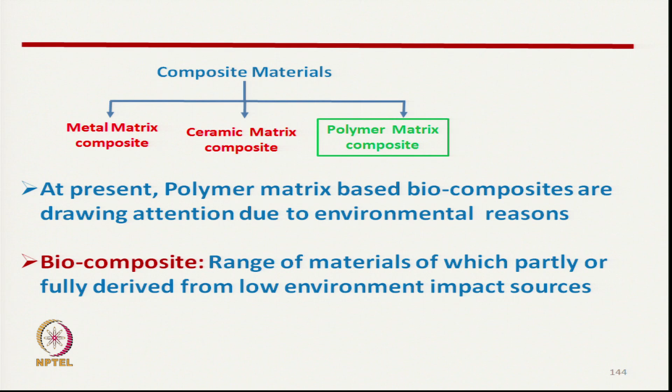So what is biocomposite then? It is a range of materials which are partly or fully derived from low environment impact sources. So at present what we will discuss is a manufacturing method of composite, where at least 50% of the composites are made of natural fiber.

So at present we will discuss the flax fiber, which is biodegradable, and for the matrix component, here we will discuss the thermoplastic fiber, that is polypropylene, where if we want we can reuse the matrix once again.

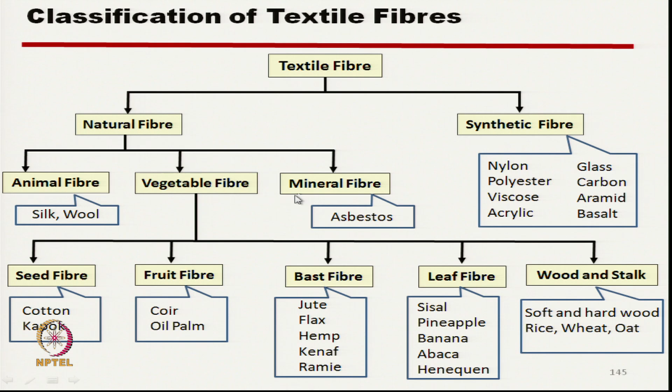So as already mentioned, textile fiber can be divided into two broad classifications: natural fiber and synthetic fiber. At present we will be discussing natural fiber, and that is vegetable fiber. Natural fiber is subdivided into three categories: animal fiber, vegetable fiber, and mineral fiber.

So present day biocomposites are manufactured mainly from natural vegetable fiber, and here we will discuss the flax fiber, which is used as reinforcing material in manufacturing biocomposites.

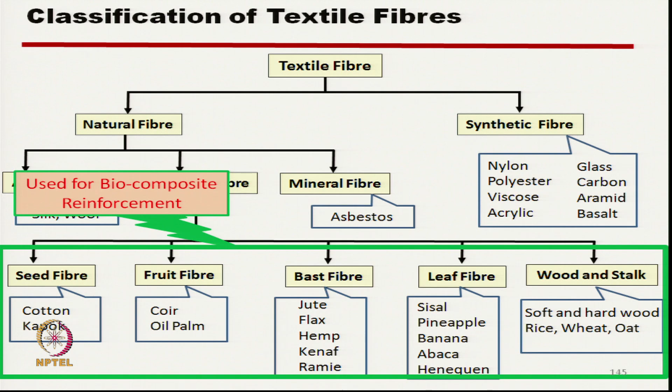So as far as matrix is concerned, polymer matrix particularly, they are of mainly two types: one is petroleum based polymer, another is biodegradable polymer. Petroleum based, as already discussed, is of two types, one is thermoset, another is thermoplastic.

So for thermoset, the limitations are they are non recyclable. Once the composite is manufactured, they cannot be reshaped or reused again. Limited storage time, longer curing cycle, and corrosive to handling - these are the disadvantages.

Due to that, present day composites are focused towards thermoplastic polymer. And if we try to use 100% biodegradable polymers, the main drawbacks are their limited availability - they are not available in large quantity - and another drawback is their cost. So high material cost to service life ratio, their service life is also low, and at the same time high cost.

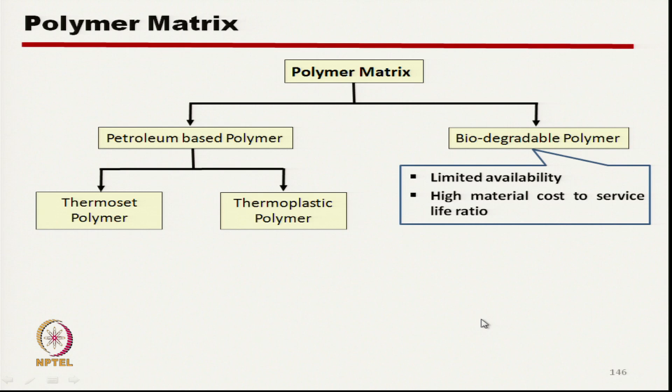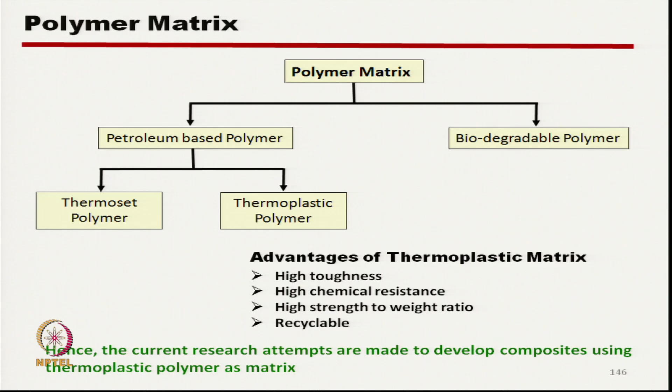So the alternate way, the only way at present, is we can use thermoplastic polymer as the matrix material. Their advantages are high toughness, high chemical resistance, high strength to weight ratio. So if we take a certain mass, the strength we get is relatively high, and most important is that they are recyclable. Hence in the present development we have used thermoplastic polymer as matrix to manufacture composite.

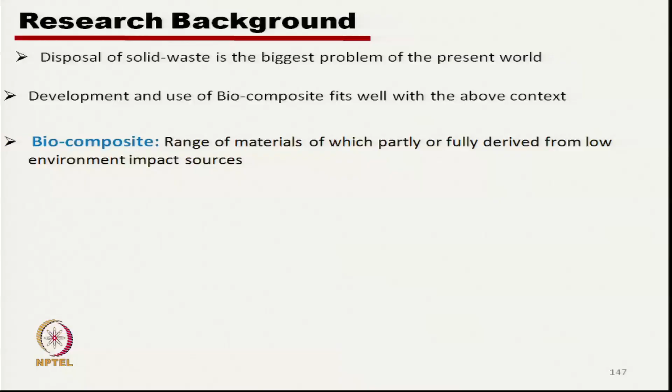So the basic driving force towards this direction is disposal of solid waste. Disposal of solid waste is the biggest problem. Once we manufacture composite from thermoset polymer, after use the disposal is the main concern, because we cannot reuse that.

So other driving forces are development and use of biocomposite, which fits well with protection of the environment, and biocomposite we can reuse again and again. But before we go for manufacturing biocomposite using natural vegetable fiber, there are different drawbacks also.

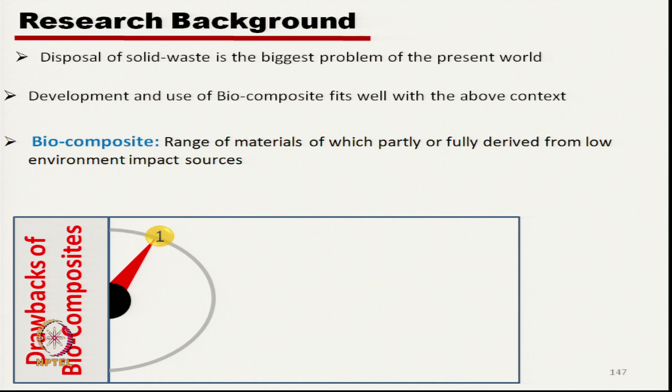What are these drawbacks? The main three drawbacks are: poor interface bonding between natural fiber, which is basically hydrophilic, and thermoplastic materials, which are in general hydrophobic. So their interface bonding is relatively weaker - that is the main concern.

Next problem is short fiber. Natural vegetable fiber, if we talk about it, we always get in short form, not continuous form. So their orientation is not along the axis. So the control of orientation of these natural fibers is very important, because we can only get continuous strand from natural fiber by twisting.

Once we twist, the fibers are aligned at a certain angle, so that we do not get the proper strength realization. And the third point is that...

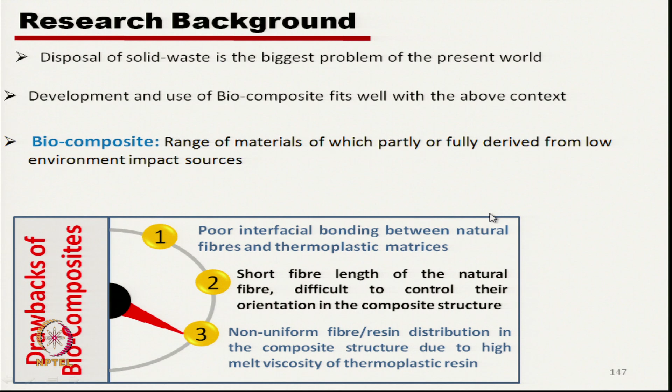So the approach is that we have produced hybrid yarn. Hybrid yarn means, as we have already discussed, where the matrix fiber and reinforcing fibers are mixed evenly together, so that the flow length of the polymer is very short. They are already inside the structure.

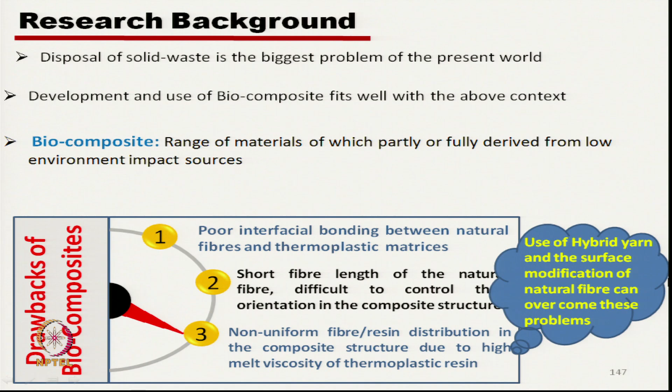And the first problem, poor interface between the natural fiber and thermoplastic matrices, is overcome using surface modification. So these problems we can overcome.

As I have mentioned, we cannot form a continuous strand from staple natural fiber without any twist. Ideally, if we get the fiber strand like a strand of parallel fibers, in that case the penetration of polymer will be easy. Now let us see the present approach.

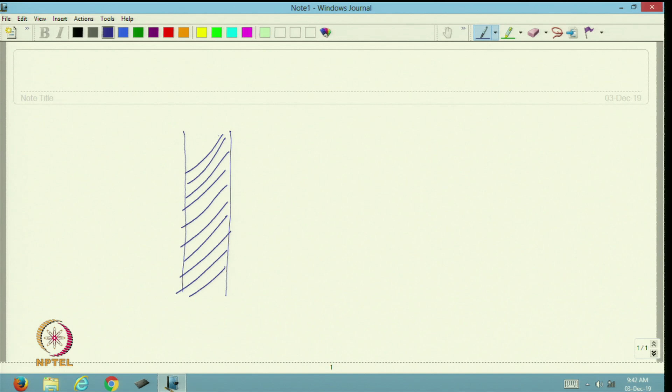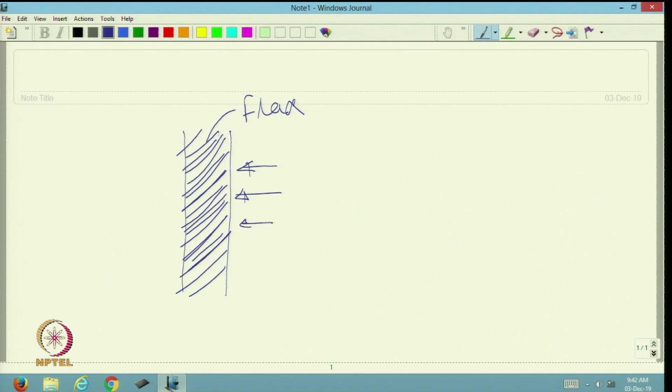Suppose this is normal staple yarn. As I have mentioned, we cannot manufacture staple yarn without twist. Now suppose this is flax, and suppose we want to manufacture a composite using polypropylene. So if we try to push the polypropylene matrix inside the structure, it will be very difficult.

Because the melt viscosity of polypropylene is very high, it is not easy for the matrix to penetrate inside the structure.

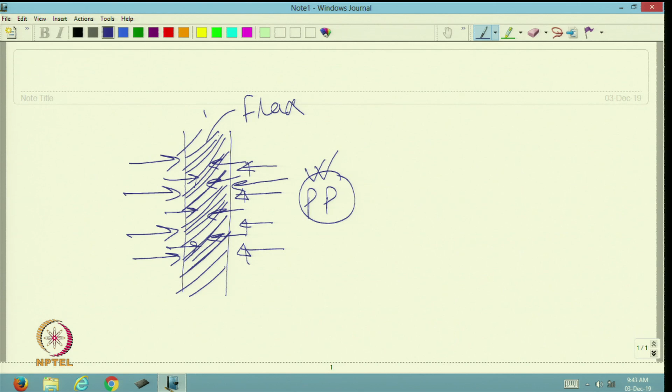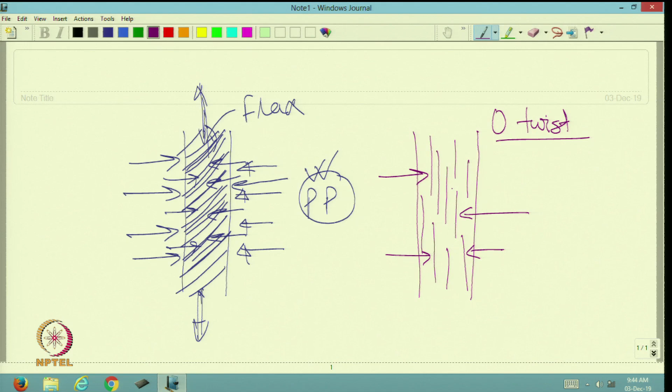So another problem is that once we twist, the fibers are at a certain angle with the load direction, so we do not get proper strength utilization. On the other hand, if we can align the fibers parallel to the axis, that means zero twist, in that case the penetration of matrix will be easier, because the fiber to fiber distance is high.

So there are spaces where the matrix can enter easily, but the problem is that it is not possible, because we have to have certain strength for handling the material.

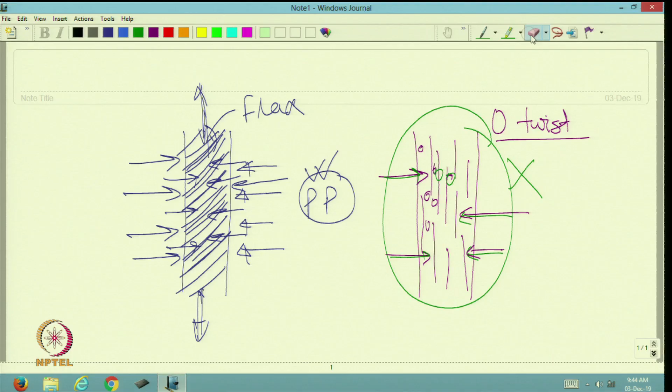So what is the alternative? In the present approach, what has been done is that rovings are made of flax and polypropylene fibers. Here these are the flax fibers, and here these are polypropylene fibers, and here again we have zero twist.

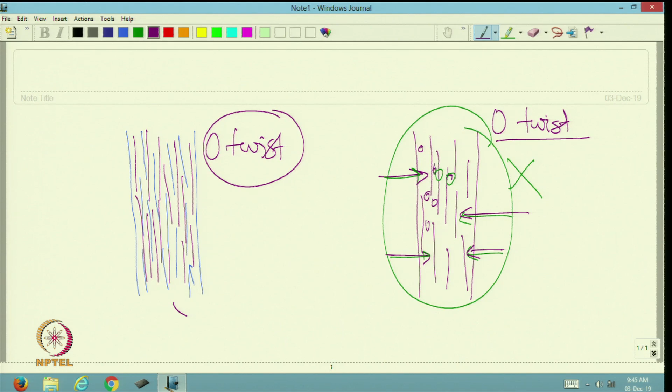But after making the polypropylene and flax roving, we treat it with heat. This heat treatment melts the polypropylene, at least the surface polypropylene fibers are melted. So they form a continuous strand, these melted polypropylene fibers.

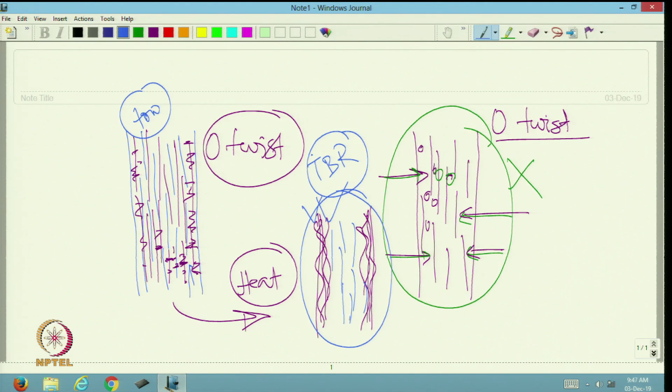And the flax fibers remain. So this prepreg, or tow preg, since we can call it a tow, this is a tow preg, which we call TBR, that is thermally bonded roving. This thermally bonded roving has got proper flexibility and we can use it in the weaving machine, and it has got certain strength also.

As has been explained, in this twisted based yarn, due to the misalignment, the strength realization is low. Although the twist improves the handling of the material, it reduces ultimate fiber strength utilization by a factor of cos theta. It also restricts the resin penetration into the bundle.

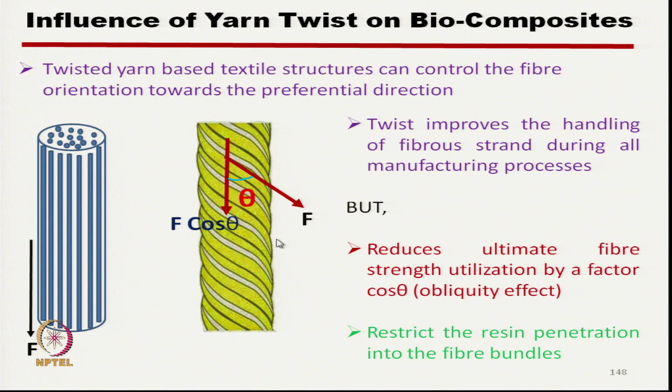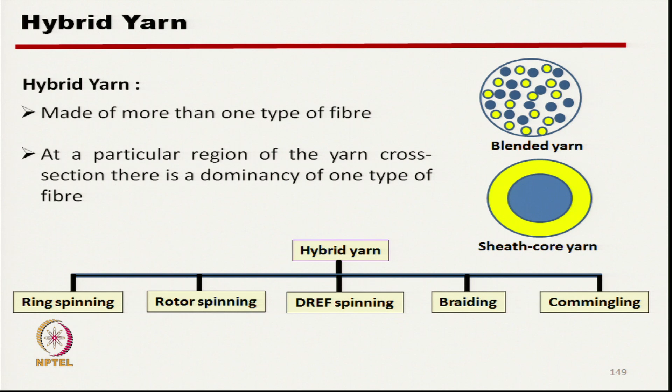As has already been mentioned, hybrid yarns can be manufactured using ring spinning, that is core sheath structure, rotor spinning, DREF spinning, braiding, and commingling. These are the different methods of manufacturing hybrid yarn. Basically, hybrid yarns are yarns where more than one component is present.

A hybrid yarn contains both matrix and reinforcing components within the structure, and it reduces the effective resin flow distance during composite formation, which is very important because thermoplastic composites have a very low melt flow index. The hybrid yarn improves thermoplastic resin distribution in the composite structure, because both the reinforcing fiber and thermoplastic matrix component fiber are already present inside the structure.

So, the void content reduces. Why? If we have the matrix fiber within the structure, the chances of void content will be less, because already the penetration of matrix components are there inside the structure, they have already penetrated.

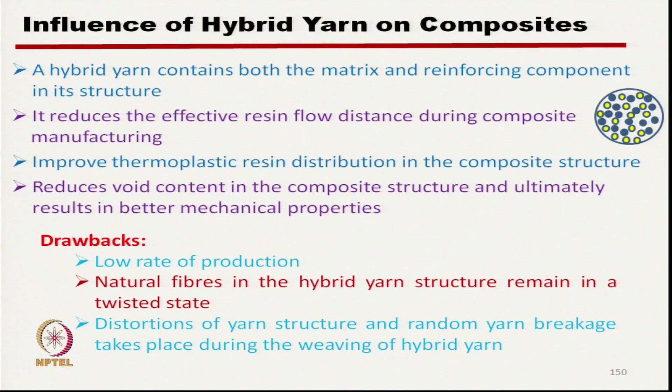If we want to reduce the twist to have better penetration, the strength reduces, and during handling, during weaving, the hybrid yarn breakage takes place.

So the main solution here is that both the reinforcing and matrix forming fibers should be there in the hybrid roving structure to have the lowest possible resin flow distance.

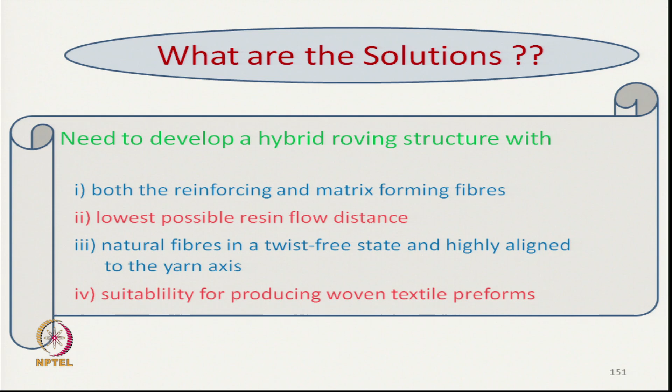The natural fibers in the twist free state are highly aligned to the axis of the roving, and we have to develop the yarn or roving structure in such a fashion that they are suitable for weaving to make textile preforms. So this novel structure we call thermally bonded roving, TBR.

It has been developed using a newly designed machine. We have modified the existing setup, and we have evaluated various properties. One question always asked is whether thermally bonded roving can be woven into a woven fabric, so for that we studied weavability.

We have also studied various other properties, such as flax fiber content, proportion of flax fiber content, and degree of mixing, and how all these parameters affect the unidirectional composite properties, UD composite properties.

After making the unidirectional composites, we produced woven prepreg. In that woven structure, the matrix and reinforcing components are already present, and after making the woven prepreg, we made the composite laminates by a layering technique.

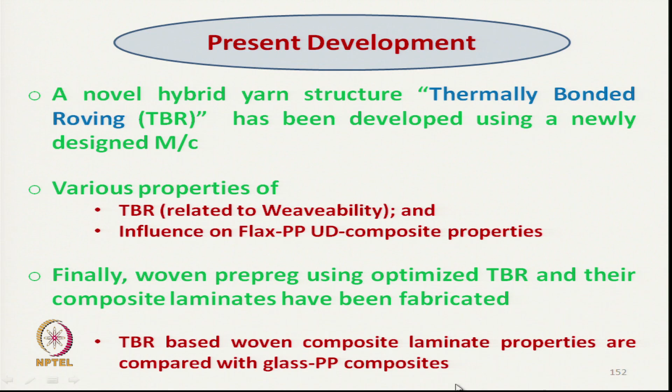So TBR based woven composite laminate properties are compared with glass PP composites, which are very common and easily available commercially in the market. The developed composite made from the thermally bonded roving of flax fiber was compared with the existing glass PP composite.

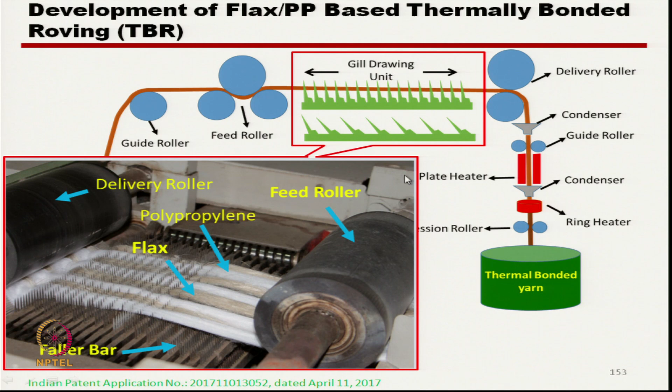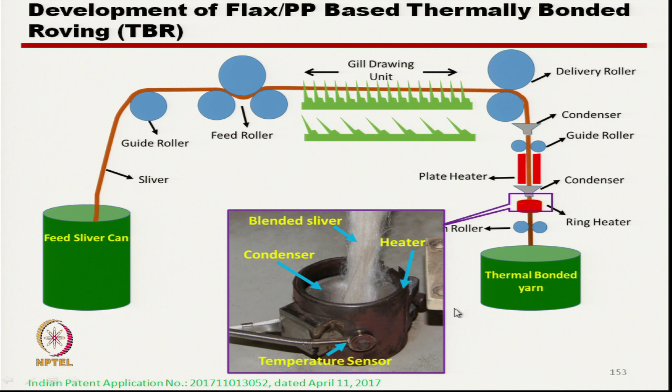After that, the final roving is passed through the condenser and guide roller, and when it is passing through the plate heater and condenser, this is the condenser and blended sliver, and here is the temperature sensor. This is the heater, and we get the roving with flax which is in the form of fiber and polypropylene which is molten.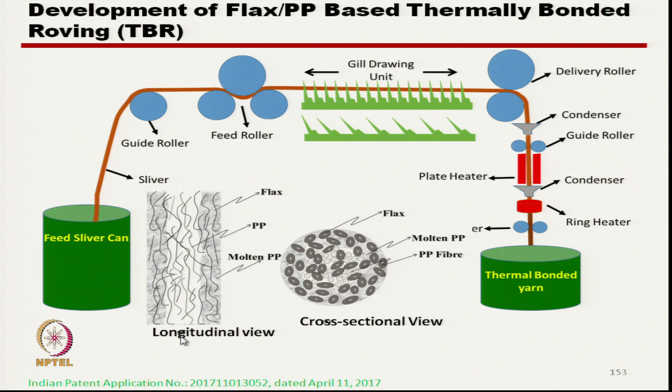Here we can see that polypropylene fibers at the surface of the yarn are melted, and the polypropylene fibers which are in the core are still in staple fiber form. So there is partial melting, which helped in having higher flexibility, it retains the flexibility. At the same time, due to melting, the strength of the strand, that is the roving, is such that it can sustain a certain load. This is the cross section where these are the flax fibers and here are the polypropylene fibers.

So, these rovings have certain strength characteristics such that we can develop a woven prepreg, and this is called TBR, thermally bonded roving. If we see here, the fibers are almost aligned towards the axis of the roving. So, we have done a detailed study.

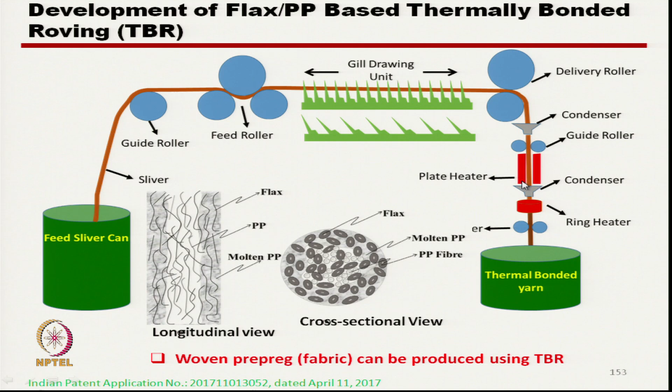I will show here in short the study that has been carried out. Now, the main question is: what about the uniformity in blending? To have uniform blending, we have used a number of drawing passages: 2 passages, 4 passages, and 6 passages. We have also varied the natural fiber flax content in the thermally bonded roving, which is 40%, 50% and 60%, three different natural fiber contents. We have also used 3 different temperatures so that proper melting of polypropylene takes place. This temperature at the heater is 180 degree Celsius, 195, and 210.

After this experimentation, we have got the response, and in Box-Behnken we have developed 15 samples of different combinations. If we see these different combinations, tenacity, modulus, flexural rigidity and weavability, that is the number of cycles it can sustain before it breaks, these parameters vary widely for different combinations.

If we see this tenacity in gram per tex, it is as low as 0.1998, and it can go up to 1.56, 2.35. So this is the range of tenacity. For modulus, it is as low as 28 or 9.66, and it is going up to say 120. So this is the range of the responses.

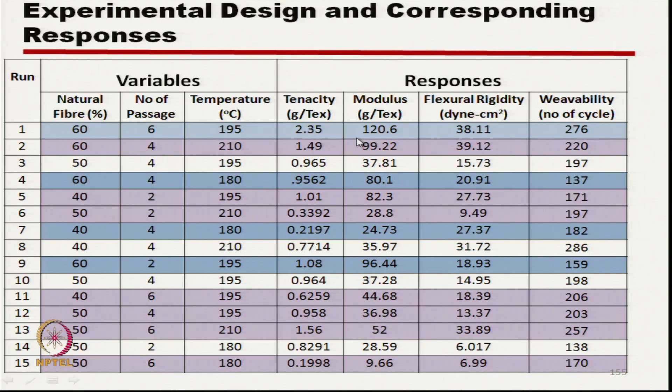Now, what is happening when we change the number of drawing passages? If we see, we have placed the flax and polypropylene side by side. These are the flax, the brown color, and green color, these are polypropylene. After first drawing, if we see, they are not mixed enough, so their identity remains, and even after second drawing, we can very well see the strands of flax and polypropylene.

But once we increase the number of drawing passages to 4, it becomes a little bit mixed up, but here the polypropylene rich and flax rich portions can be seen. It is easily visible, polypropylene rich segment and flax rich segments, although their continuity has been broken. But if we further increase the number of drawing passages to the 6th drawing passage, what has been observed is that the flax and polypropylene fibers have been mixed uniformly.

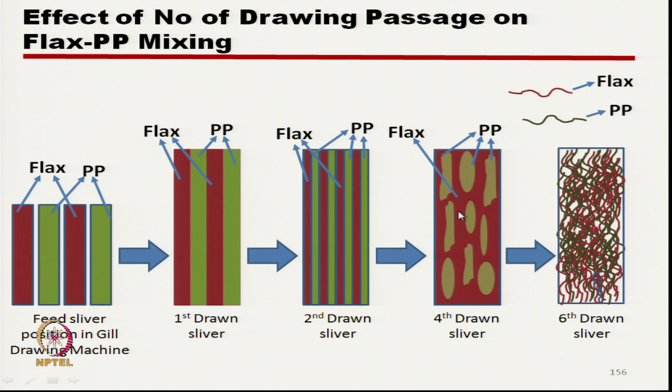Now, if we see the actual photograph, after second drawing passage, we can see this portion is the polypropylene rich portion, this is the flax rich portion. Going back to the earlier slide, here see polypropylene rich portion and it is a flax rich portion. So this identity remains here. Now, after the 4th drawing passage, although the continuity has been broken, if we see this bright, whitish portion, this is the polypropylene rich zone, here it is the flax rich zone. So that is shown here, polypropylene rich zone and flax rich zone, this type of thing happens.

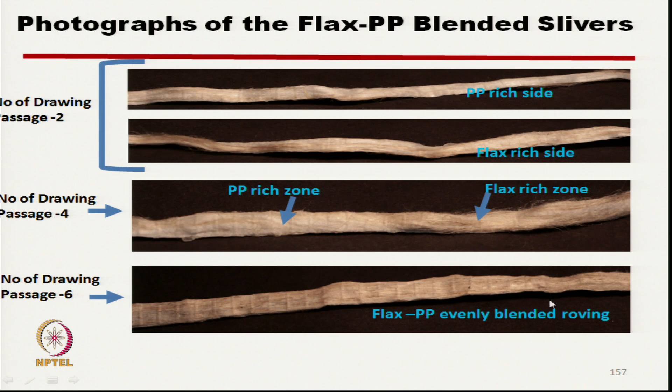But after the 6th drawing passage, it has been observed that the polypropylene and flax have been evenly blended. If we see the response curves for all these 3 variables, this is the effect of temperature and natural fiber content on tenacity of the roving, which is the prepreg. So at constant drawing passage, we have kept the drawing passage at 6 as a constant, and in this axis the temperature is constant.

So at this stage, if we see, roving tenacity increases with increase in natural fiber content. So from 40 to 60, if we increase the natural fiber content, which is basically the reinforcing component.

If we increase the reinforcing component up to say 60%, from 40 to 60 it continuously increases, but this trend may not be same if we further increase to 70-80%, because the matrix component has to be there, since the fibers are in parallel stage.

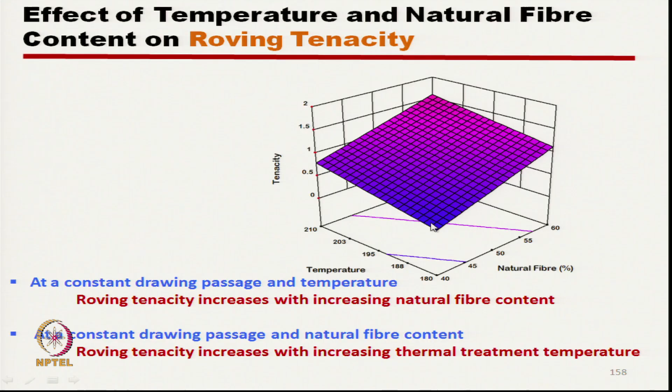If you see this axis at constant drawing passage of 6 and natural fiber content of 40%, roving tenacity increases with the increasing thermal treatment temperature. That means proper melting of polypropylene is taking place.

So we can have different trends for different parameters. I will go quickly. At constant drawing passage of 6 and temperature, the roving modulus initially decreases with the increase in natural fiber content, and after 50% it increases sharply.

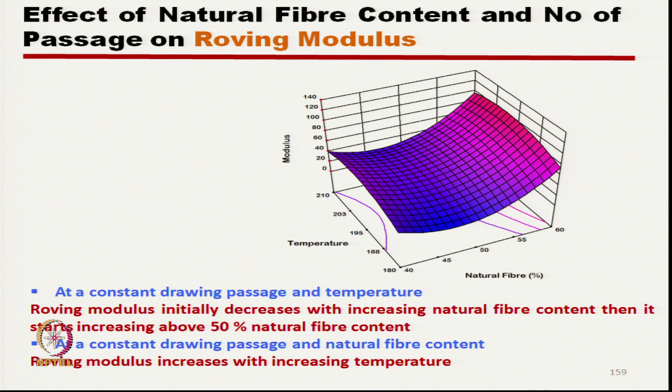As far as temperature is concerned, if we increase the temperature, the modulus increases, because of proper binding of flax fiber with the matrix. As we increase temperature, more melting of the polypropylene fiber takes place, and it binds the flax closely and properly, so it increases the modulus.

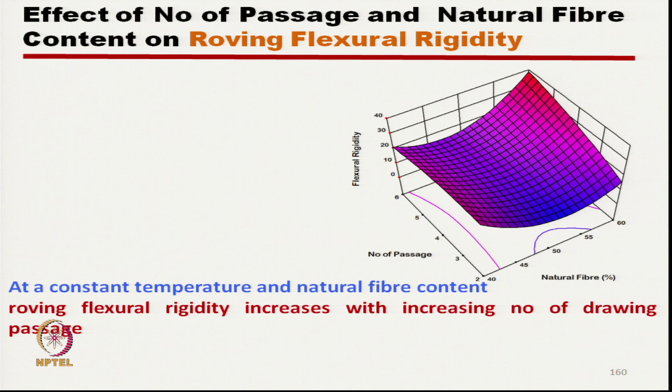Similarly, roving flexural rigidity - effect of number of passages and natural fiber content, with temperature kept constant at 210 degree Celsius. The roving flexural rigidity increases with increase in number of drawing passages, since proper blending takes place and proper alignment of flax and polypropylene fibers occurs, along with proper binding of flax fibers.

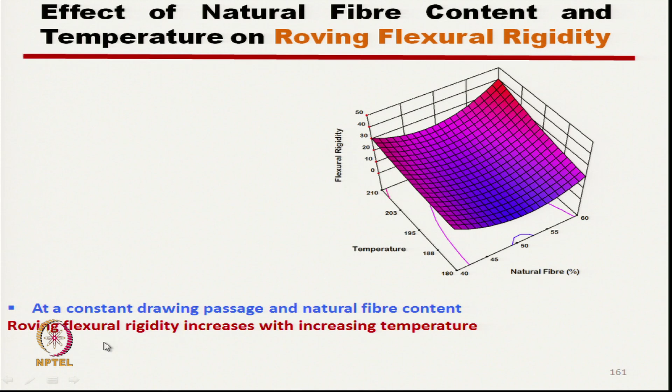So it increases the flexural rigidity. Regarding effect of natural fiber content and temperature on roving flexural rigidity - at constant drawing passage and natural fiber content, roving flexural rigidity increases with the increasing temperature.

If we see the roving weavability - effect of temperature and number of passages at constant natural fiber content, say here we have kept the natural fiber content at 60%, and at the same number of drawing passages, the weavability increases with the increase in temperature. That means proper binding of natural fibers occurs, which enhances the strength and thus weavability increases.

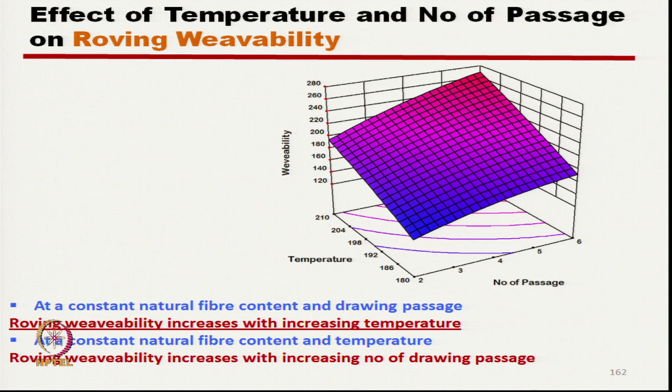On the other hand, with the increase in number of passages, we have proper blending and proper binding of the natural fibers, so weavability also increases here.

Now we will study the effect of the flax-PP thermally bonded roving once we produce composite. We have produced unidirectional composites and will see their characteristics. From the thermally bonded roving we have produced, we initially used it for manufacturing unidirectional composites, and in the next stage we did weaving and used this woven prepreg to manufacture composite once again.

Now, our next approach was that these are the flax fibers, this is thermally bonded roving, and these are the matrix component - the polypropylenes, molten at the surface.

We will use this thermally bonded roving for manufacturing unidirectional composite - these are the thermally bonded rovings, 1, 2, 3, 4. So 1, 2, 3, 4 such number of rovings we will put together, and if we see the cross section.

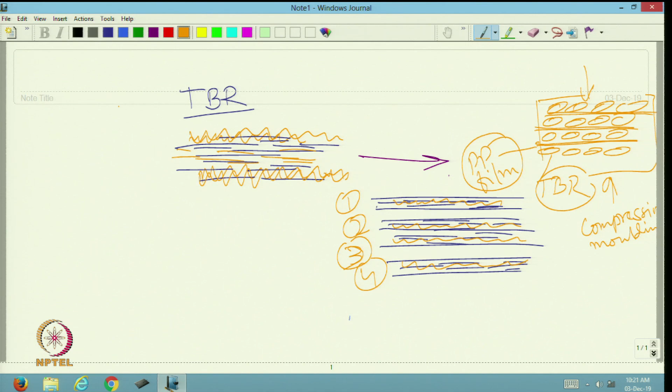This is approach 1, where this TBR is a prepreg for manufacturing composite - this UD composite, unidirectional composite, where fibers are parallel to the axis. In the second approach we will use this TBR, thermally bonded roving, to manufacture woven fabric.

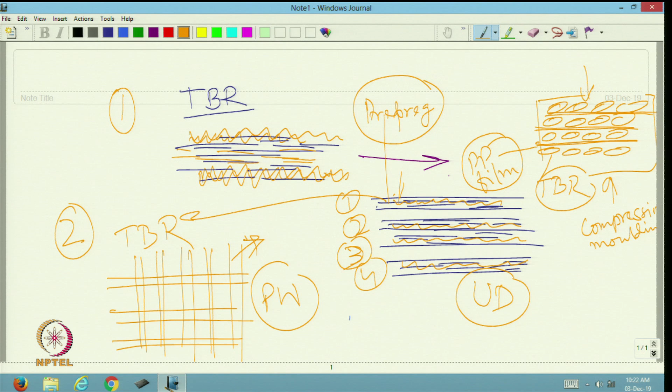So this is UD composites, and this is plain woven fabric we will make. In the next class we will discuss these two different types of composites. Till then, thank you.